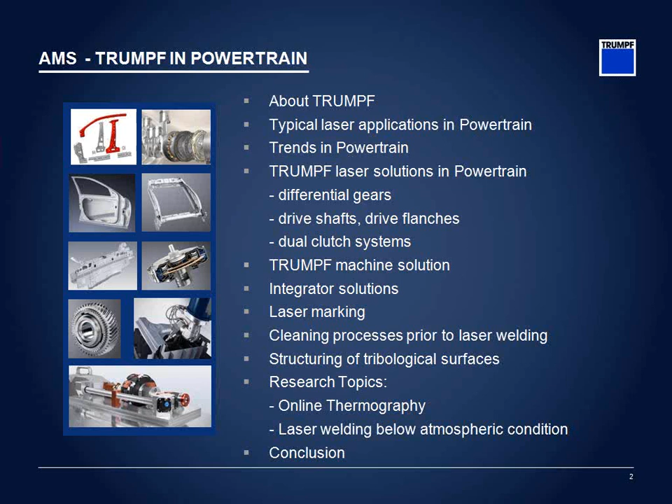Some information about TRUMPF, some typical laser applications in powertrain, and some trends in this field. First of all, TRUMPF is a high-tech company for laser and machine tools, and we have approximately 10,000 employees worldwide, and we are represented in all world markets, close to our customers with about 58 subsidiaries.

TRUMPF is divided into three parts. The biggest one is our machine tools, where we are producing flat-bed cutting machines, bending machines, punching machines, all for the sheet metal process. The second biggest part is where we are from - this is the laser technology of TRUMPF and the electronics field. We are producing solid-state lasers, CO2 lasers, and of course 3D machines, for example for cutting and welding processes, which we're going to show you later in more detail.

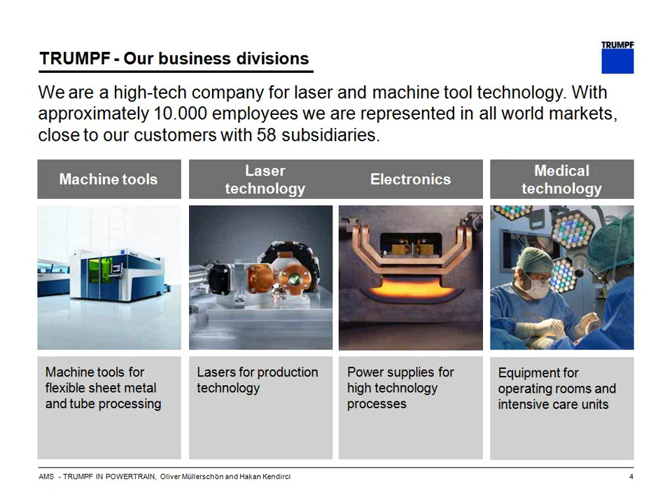The electronical field of TRUMPF means we can supply, even in the powertrain field, machines with induction preheating systems, for example. And the third and youngest part, on the right side, is the medical technology of TRUMPF. We are producing equipment for operating rooms and intensive care units.

Let's switch now to the laser technology of TRUMPF. Here on the left upper side, you can see we are producing CO2 lasers from 700 up to 20 kilowatt output power, and solid-state lasers in different kinds of areas. We can use these solid-state lasers, which is what I'm going to show you later in my presentation.

Of course, marking systems, which we are producing at TRUMPF in Switzerland, are used even for the powertrain business for marking parts, to mark a DMC code, for example, for traceability. I'll show this in the next slides as well.

The 3D machines, which you can see on the right upper side - this is an example. Our TruLaser Cell 7040 is mainly used for cutting processes, for example for hot formed parts which we cannot punch anymore - they're really hard, so we can use these machines to cut, for example, a B-pillar of a car made of these hot formed parts.

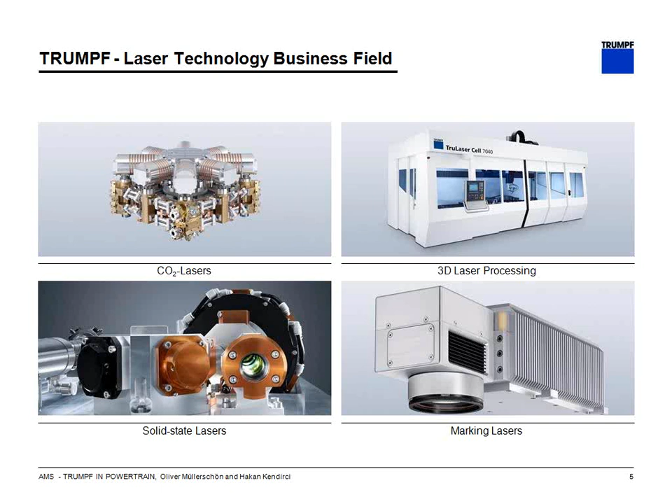Let's come now to the field of powertrain. Some typical applications are divided within TRUMPF into two groups. On the upper side you can see some examples of gearbox components, like a conventional gear part or a differential gears.

What I'm going to tell you more detailed in the next slides is the technology of double clutches, a very famous application worldwide. Even automatic transmission like 8 or 9-speed, nowadays up to 10 gears, uses laser welding for such typical applications in the field of powertrain components.

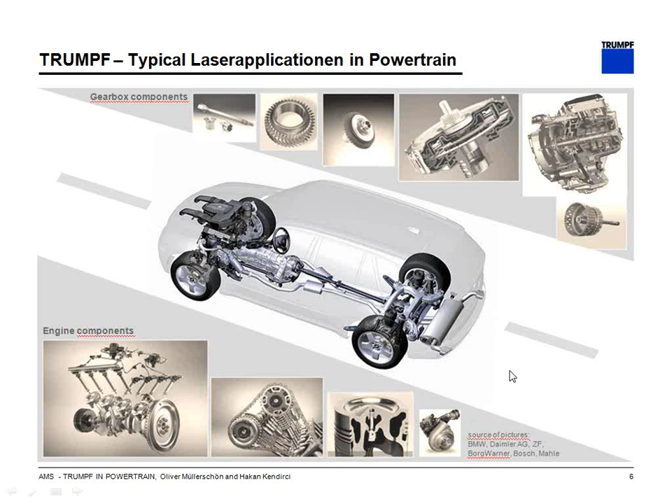On the lower side you can see some examples of engine components, like cams. A very important thing in the next few years, our upcoming technology, is to use steel pistons instead of aluminum parts, and of course the turbochargers.

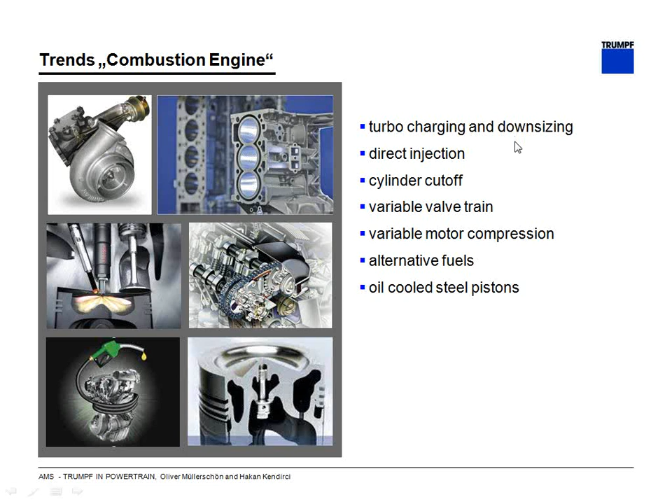This is a very common technology to reduce the consumption of a car in the near future. Some trends about combustion engines - you can see examples here. Turbochargers are going to be really important, and the downsizing of engines too. You can see examples here, even steel pistons again, the same on the side of transmissions.

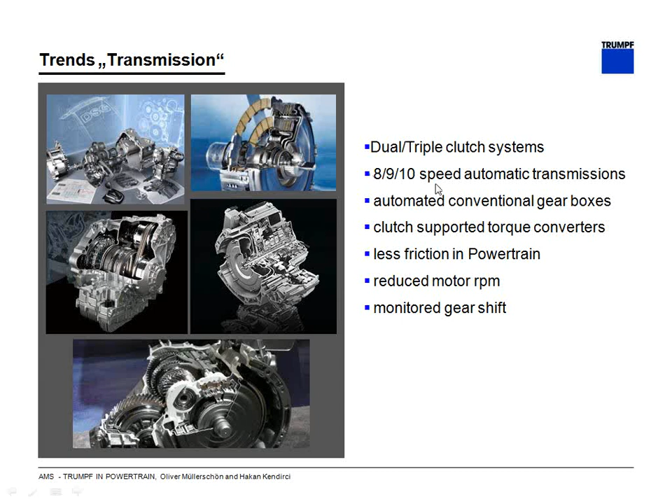I already mentioned the technology of double clutch or triple clutches coming to the market, and of course 8 to 10-speed automatic transmissions where we're welding with our lasers and systems a lot of different parts, which I'm going to show you later. So let's come now in more detail to these applications.

I want to start with a very interesting thing: laser welding of differential gears, with and without filler wire. Both applications are in mass production. In the next slides you're going to see more details about this.

Laser welding with an induction preheating system is sometimes necessary when we have two partner materials with a high carbon equivalent - then we can use our equipment for preheating prior to the welding process. Last in this part is laser welding of double clutches, where we can show you a cross-section with a lot of different laser weldings made with our systems.

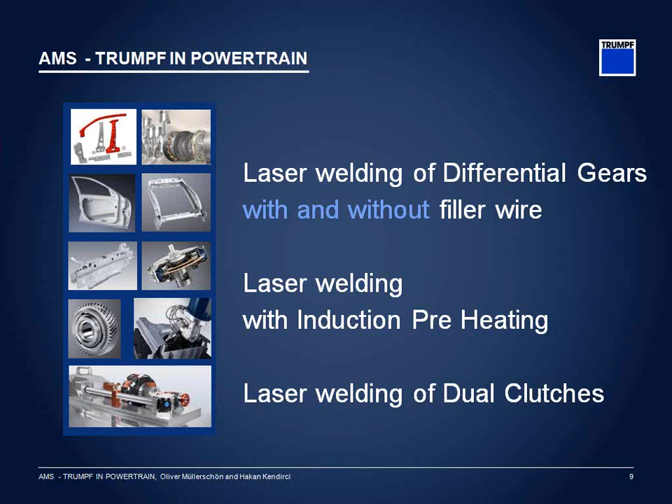Let's start now with the area of differential gears with filler - this is the reason it's colored blue for additional material. A few slides later I'm going to show you the same combination of cast material for the housings and case hardened steel for the ring gears, joined with a laser without any filler wire.

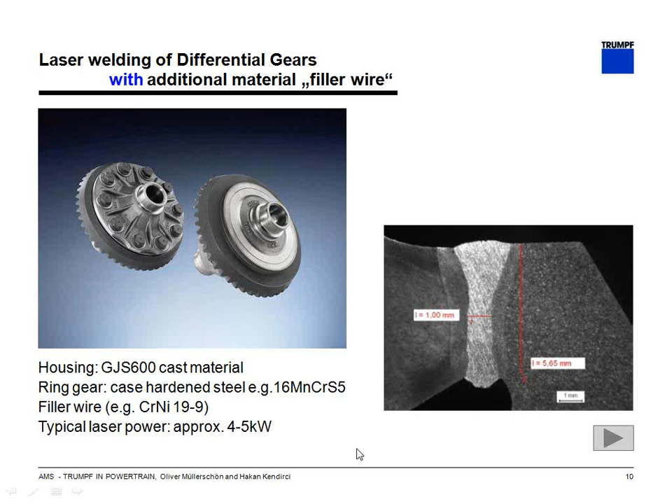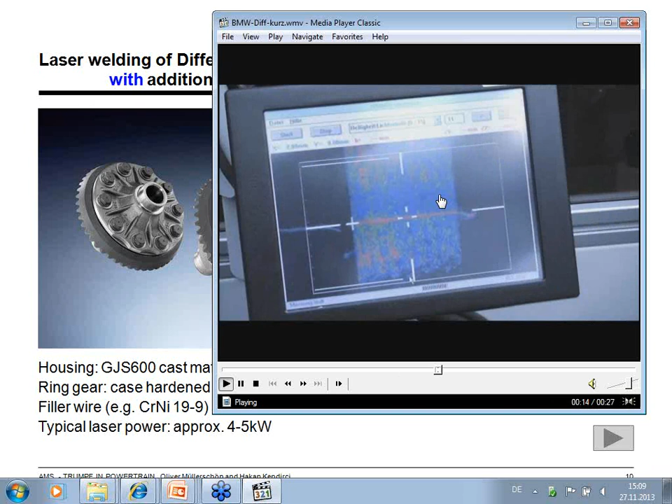In this example I can show you a short movie. You can see our welding head, equipped with a wire feeding system and a sensor system to find the right position. Then we can start directly with the wire. Typical laser welding speed is about 1.5 to 1.7 meters per minute.

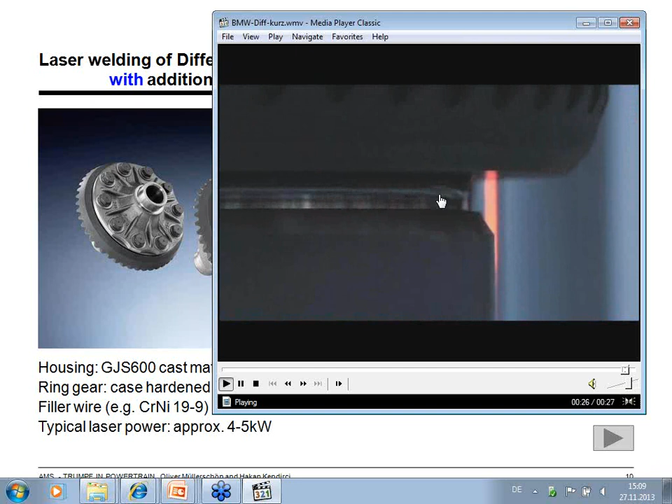You can see a typical cycle time - this is a very short one, about 30 seconds. The welding time itself is about 15 to 20 seconds. This depends on the diameters of the parts.

What was the idea to weld these parts? You can see on the left upper side the old bolted version, with these bolts here. I think it's quite easy to understand this is a very expensive application. So in 2004 we started to develop, with partners and companies like BMW, to weld these parts instead of using bolts for joining the housing and the ring gear.

What was the idea? Of course to reduce costs. It was also important to save material and in the same way reduce the weight of these parts. You can see these dimensions - with the bolted version we had a big flange, a big diameter, and the thickness was necessary to join these parts. With the laser welded version, the thickness is much thinner, and even the diameter of the housing could be reduced, so it was possible to reduce the weight.

Nowadays this is mass production, with a 360 degree laser welding to join the ring gear to the housing. It was also possible to transmit larger torques and to reduce or change the noise emission while using the car. This was also very important for our customers when we developed this application.

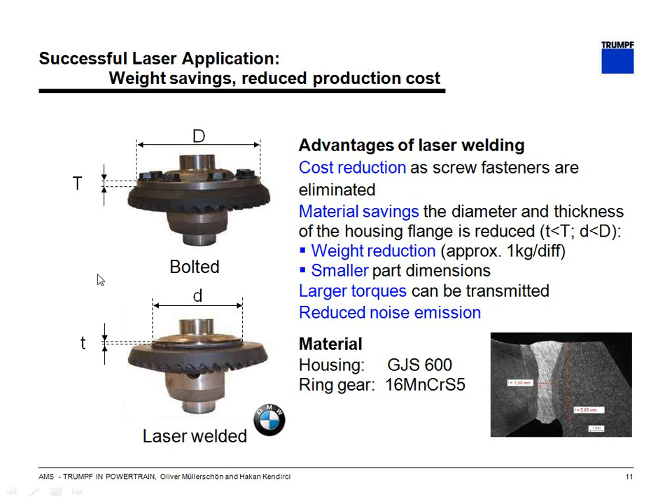Just an example here of an installation in the US, where we are producing a lot of these parts for a big car maker in the United States. The first step is always to clean the parts.

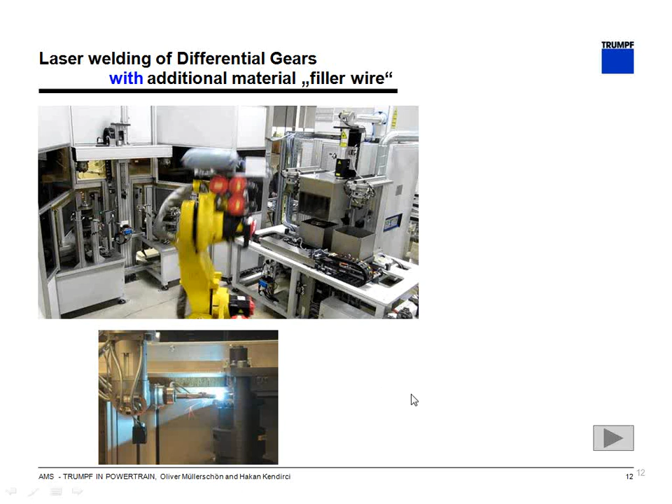That means with the first station - this is just an example, nowadays it's much smaller with the latest technology - we can clean the ring gear, for example. That means the surface where we have to join the partners, and the housing, which is made of cast material, with laser technology instead of a washing machine. The washing result is a very stable one, and this can be positioned prior to the welding process.

This is the machine you can see here in the left back side. This is a laser welding machine made by TRUMPF with two rotary tables. We have to place with the robots the washed or clean parts, and then we will join it, press the parts, and weld it in the same rotary table.

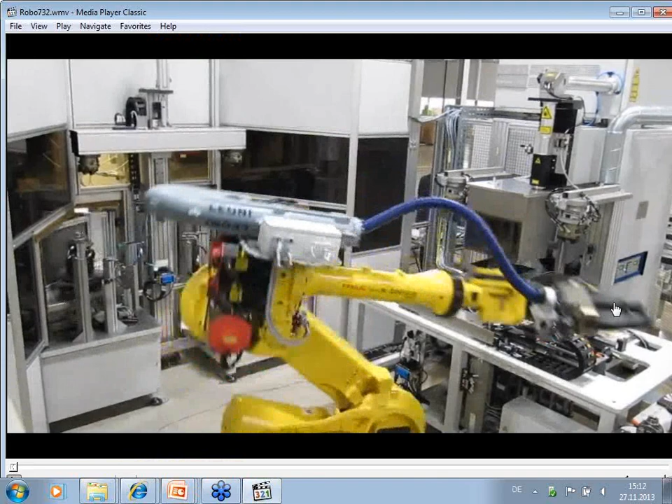Just to give you an idea, there's another short movie. The robot will pick up the raw parts, the housing and the ring gear, and place them at the laser cleaning station. After the cleaning process, it will be placed at the second station of the laser welding machine, in the back here.

So internally, we have the press step and the welding step. After this operation, we have to bring back the welded part to the same workpiece holder, because the bevel gear is already joined to the differential gear.

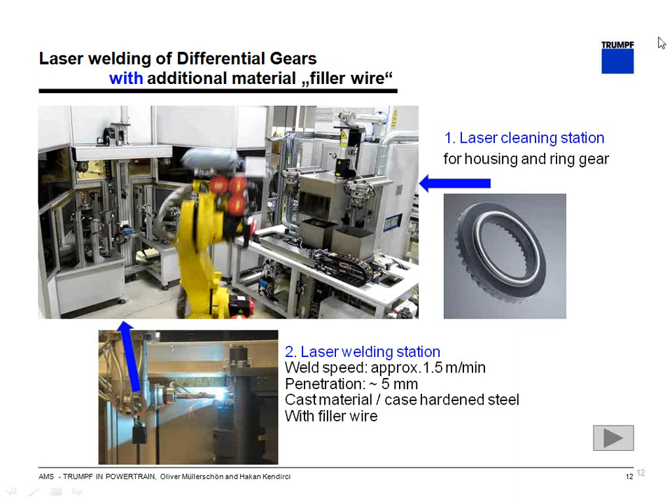Several years ago, there was an idea to weld these two partners - the housing, cast material with GJS 600, and the ring gear, mainly a case-hardened steel - without any filler wire. But the problem is it's a kind of hardening process, because the carbon content, especially of the housing, is very high, and if we go higher than 400 HV in hardness, there's still a risk for cracks.

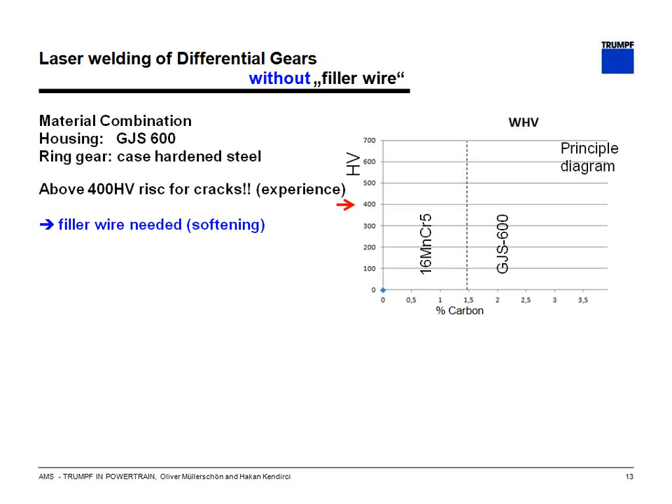This was the reason why most applications worldwide use filler wire to join these two partners. But there was still the idea: what happens if we mix the materials - material 2, the cast material, on the right side, and the case-hardened steel on the left side. If we're able to mix it in the right way, there's a special effect with the hardness. Done correctly, there is one mixture, one carbon mixture, which allows us to weld the parts without any wire and achieve a lower hardness.

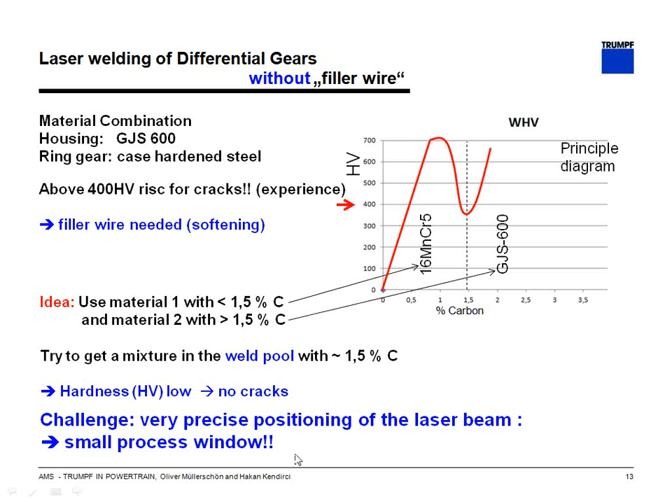But the challenge is we need very precise positioning of the laser beam, and it's still a small process window. Therefore, we developed a special sensor system called TRUMPF SeamLine Pro, together with a car maker.

This sensor system is able to detect three different steps with one camera. The first is the pre-sensor, so we can measure the joint and see where we have to weld or position the laser beam.

In the same way, we can get information with our in-sensor. With this sensor, we can look directly onto the keyhole, the process itself, and see the center of the focused beam and the welding process. If the part is designed correctly, this sensor can also tell us whether full penetration has been reached or not.

Thirdly, we can get information about the quality of the welding surface with our post-sensor, detecting things like overfill, a groove, or an undercut, so we can provide information about the quality of this process. With this system, we can document a lot of data for traceability, because we store many pictures from our camera system.

You can see here this is a welding head made by TRUMPF, and this is a special camera system. It's also possible to send a lot of information for the quality process for our customers.

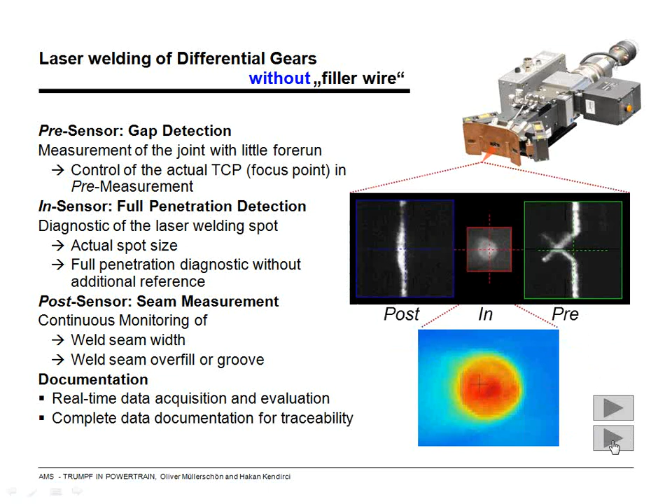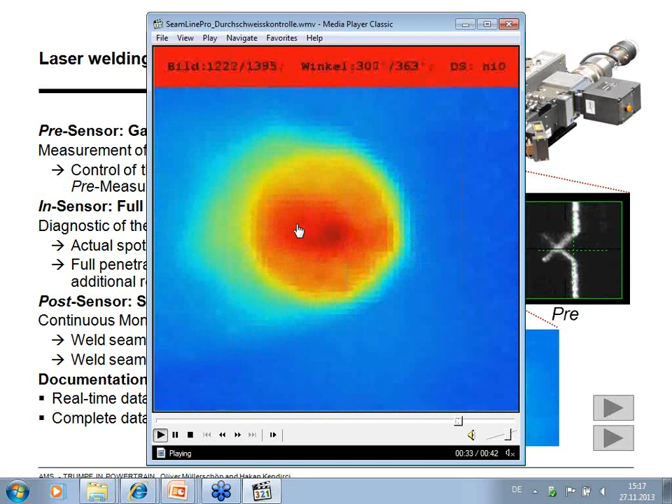In the same way, as I already mentioned, we can have full penetration detection. Let me bring it forward. You can see now this little black cross - this gives us information about full penetration, because this is the end, we have a complete look through the keyhole. If we detect this, we can provide information that we have full penetration.

This is an example from Daimler on that slide. You can see it's in mass production, welding without filler wire of these two joining partners. You can see the part itself, and a very thin and narrow welding seam on the right side, made without filler wire. The welding speed is 3 times higher, or up to 3 times higher, compared with the conventional laser welding process with wire.

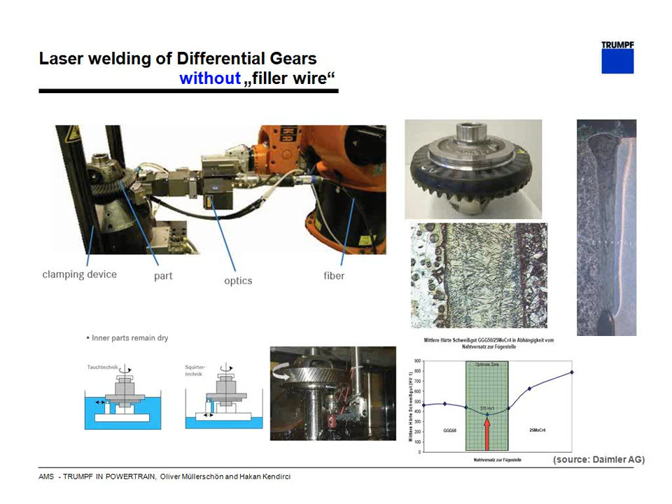In the same way, of course, you can save a lot of costs because we don't need wire. But if you like to start such an application, we need to develop it together with you, because we need a special preparation of the part itself.

So let's switch now to another application. If we have a lot of carbon equivalent with the two joining partners, very often we have to use an induction preheating system within TRUMPF. We are also able to provide such an inductive generator, an HF generator, for a preheating process.

I will show you some details about such a typical application, with this example of laser welding of drive flanges, or flange tulips. I just want to start this movie here.

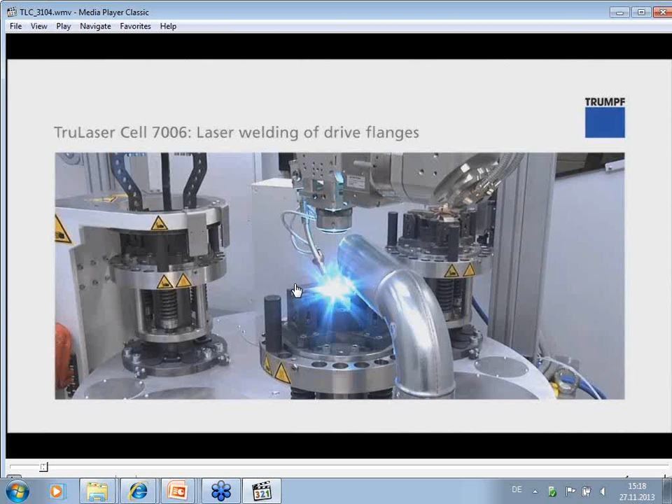At the very beginning, we will receive already pressed parts with this conveyor system. A robot system will pick up the part and place it on the rotary table, where we join and clamp the parts. Then we will dial the table to the next station.

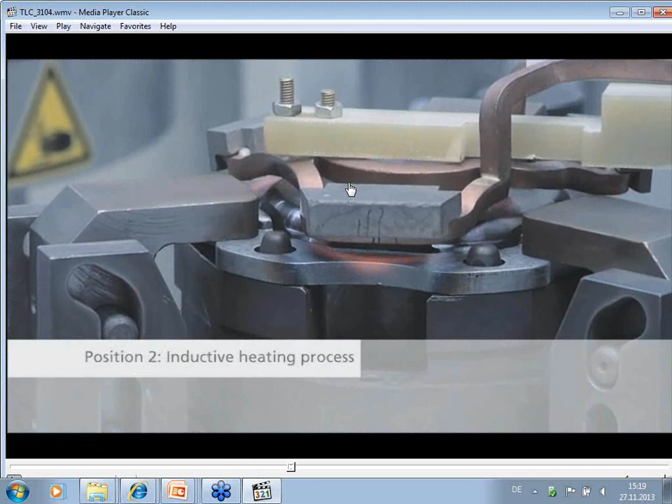The second station is the preheating station. Now you can see the inductor here, and we will heat up the part, and in parallel on the third station we can weld the part. So we can do it at the same time. You can see now the part here a little bit glowing.

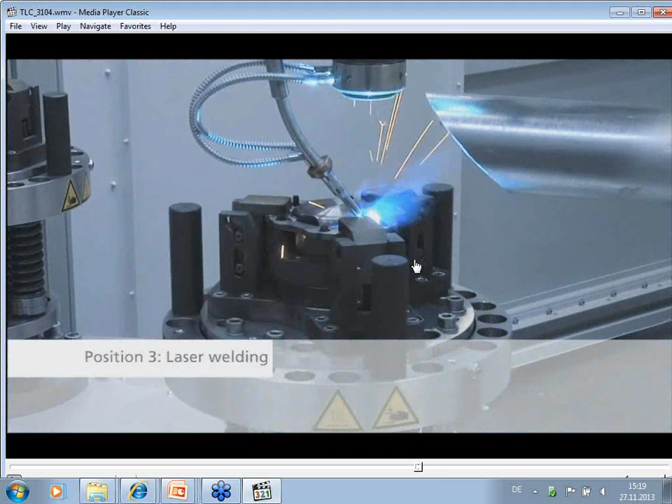The third step, as already mentioned, is the laser welding process, a deep welding process. In this example it's about 5 to 6 millimeters deep penetration. The temperature with this induction preheating system before we start to weld is about 450 to 500 degrees centigrade. With this process, we are able to reduce the hardness, so there's little or no martensite inside the structure of the material. After the welding process, we bring it back to the next exit conveyor.

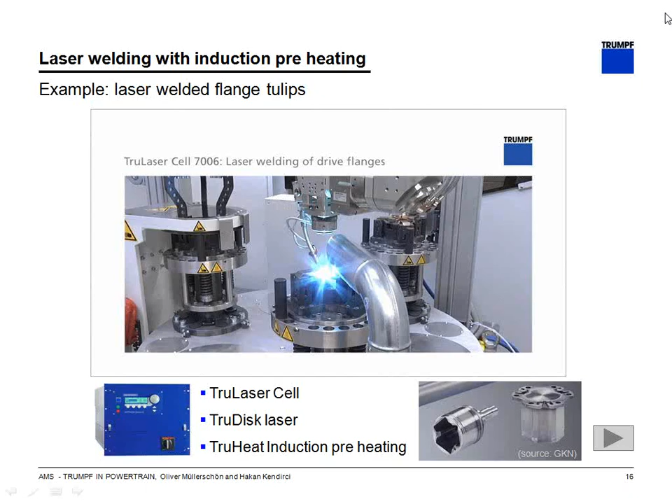The third application here is a very common one worldwide: laser welding of dual clutches or double clutches. Especially Volkswagen started with this application some years ago, together with the company BorgWarner, where we developed this process.

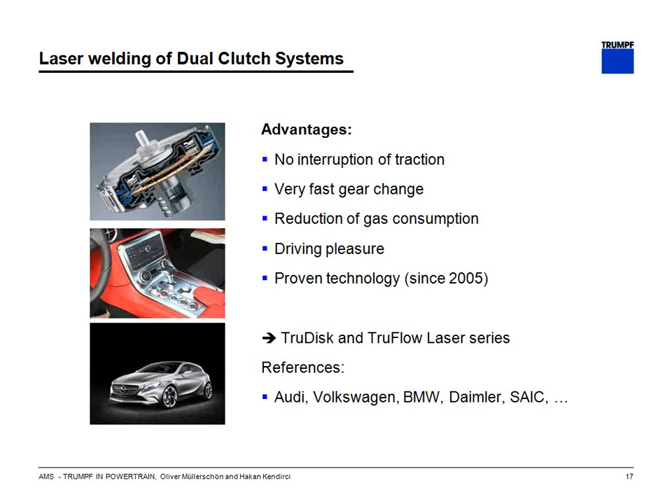You can see here some references. I think all of you know about this technology - it's a very fast gear changing, there's no interruption of traction. It's a very good feeling to use such a technology in a car. It feels like a race car. It's fun to use.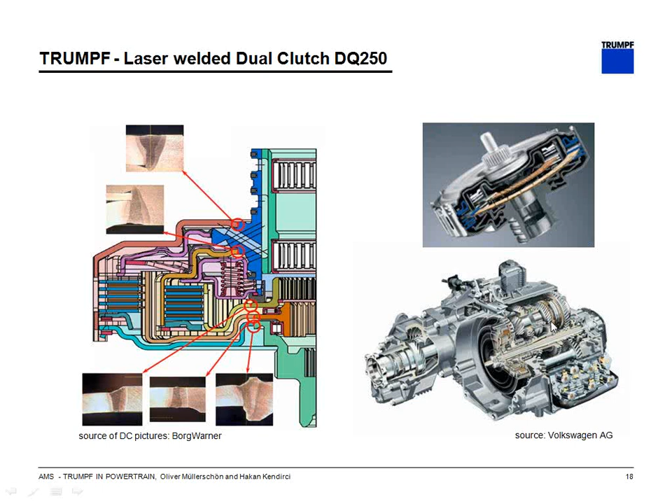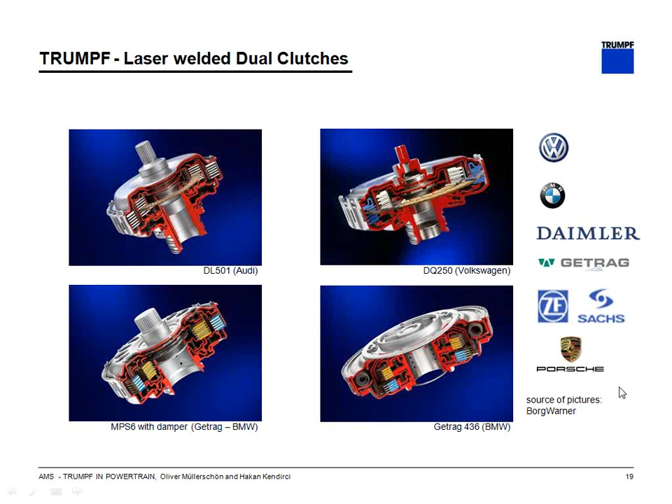Here's some references, some ideas. Since that time we started a lot of productions worldwide to produce different kinds of double clutches. What you can see here is just some examples and references where we are producing these parts with our lasers and machine systems.

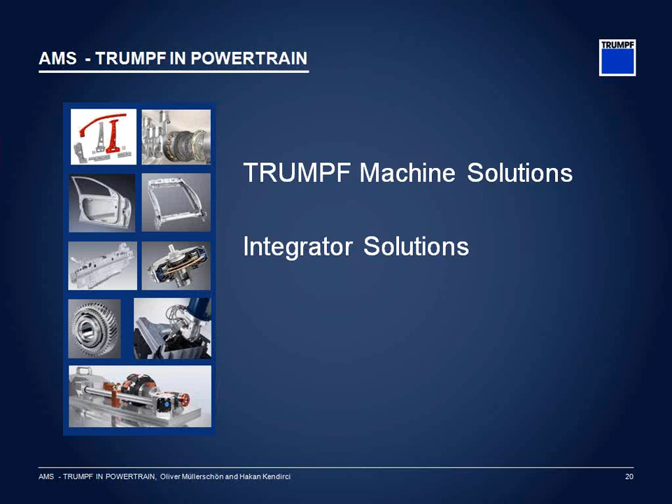Let's switch now. I want to give you some ideas about machine solutions made by TRUMPF. At the same time, if we need a fully automated production line, we have a lot of partners worldwide, and I want to give you some examples for a mass production system.

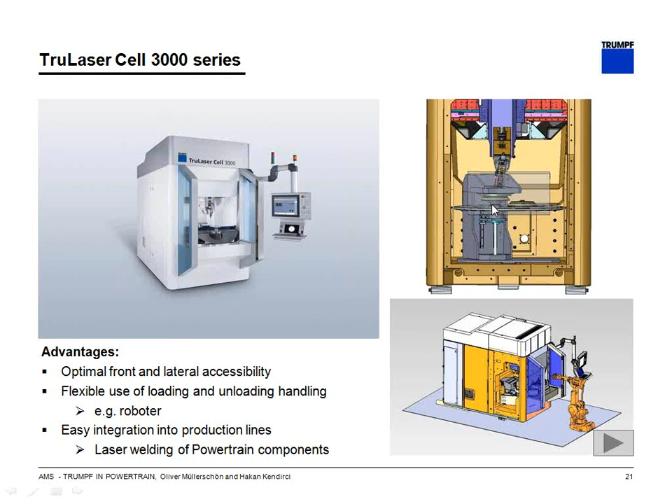Let's start with this machine. This is a new development within TRUMPF, our TruLaser Cell 3000 series. It can be equipped with a rotary or dial table and a C-press, which you can see here, to join the parts, to press the parts, to hold them down while we are welding. It's a very compact system, which we're going to see now in the next movie.

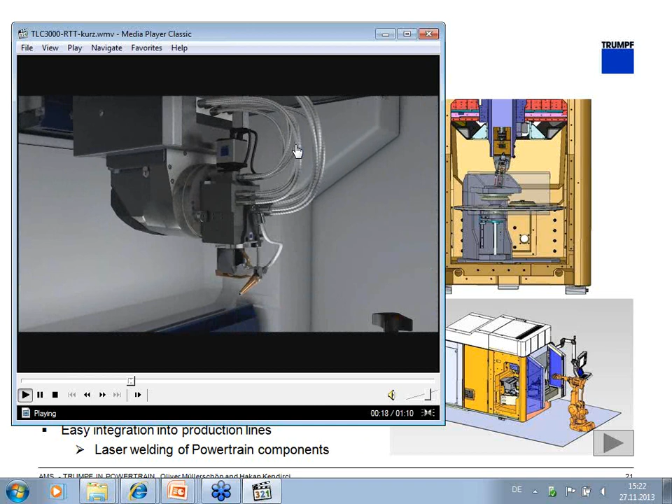You can see this is equipped with a dial table. This is just an example part. As you can see, it's a very compact footprint. All the safety enclosures are already around, and it's quite easy to change from a cutting process to a welding process just by changing parts of the optic.

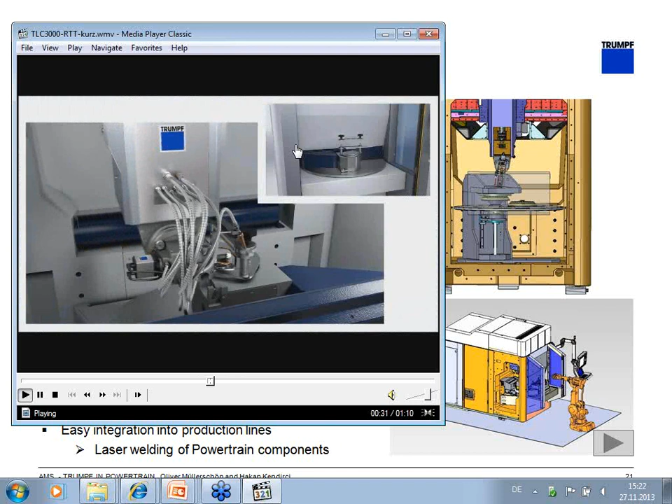While we are welding inside, as you'll see in the movie, we can load and unload outside in a manual way, or do it with a robot, it doesn't matter. You can see outside we can load and unload while we are welding inside.

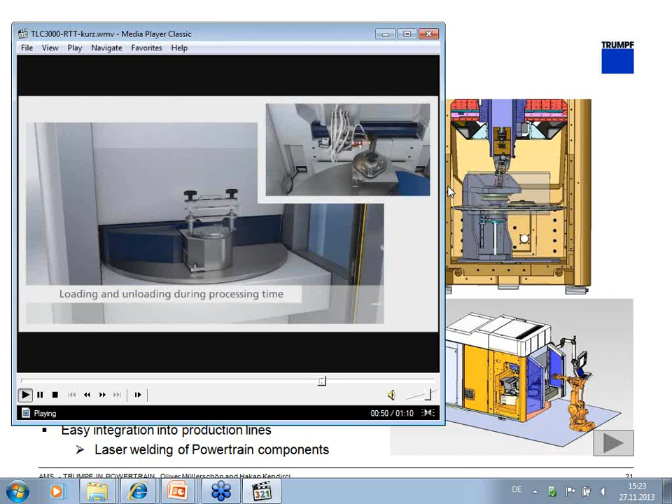This machine can also be used for a 3D cutting or welding process, as you can see in this example. If we bring out the part, it can be transported to a conveyor system, and as I already mentioned, we can load and unload again with the robot outside.

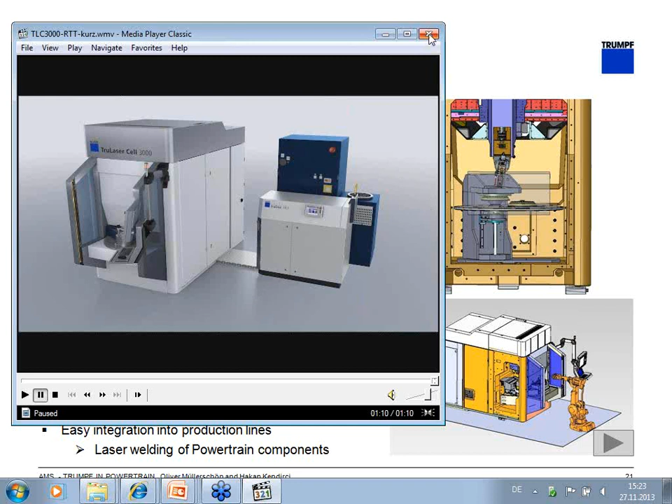What we need, of course, is the laser source, the solid-state laser. In a few seconds you're going to see it - here it's a TruDisk laser, for example, and a chiller device, and the extraction system is needed for the welding fumes coming up from the process. But as you can see, it's a very compact principle and a very nice and small machine.

Very often, of course, we have to quote a big machine system together with our partners. Here's just one example, company EMAG. They are integrating our TruMark lasers, for example, for a marking or cleaning process, and of course the TruDisk laser series of TRUMPF for the welding process itself.

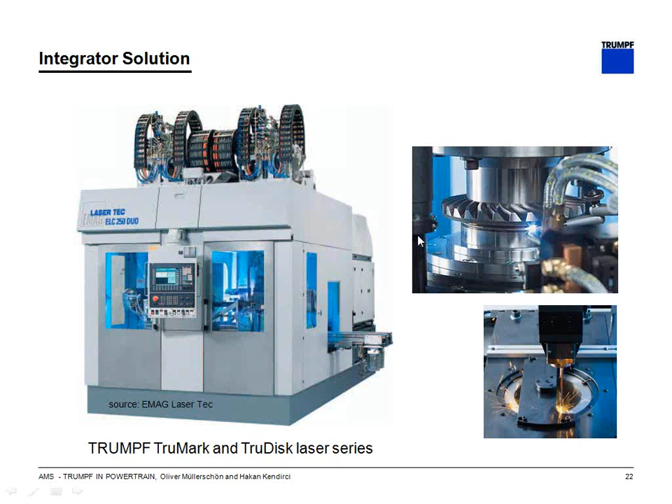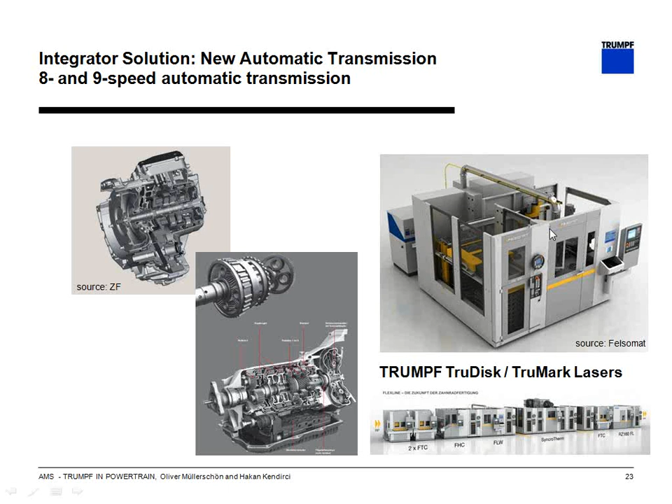Here in this example you can see another welding process for differential gears. A second partner, just as an example, is the company Felsomat. With this company we launched, one year ago, the first production lines for the 8- and 9-speed automatic transmission of ZF, which you can see here in the pictures in the United States. On the back side of the machine you can see the TRUMPF solid-state laser, and we can bring the laser via this flexible fiber cable to the welding cell inside this machine system.

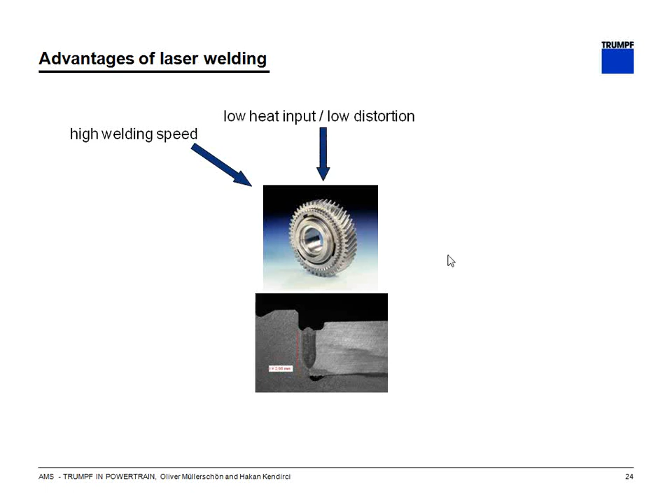Here I'm going to show you some advantages of the laser welding process - I think it's well known already. Of course, we can weld with a very high speed. We have a really low heat input and low distortion with this welding process. We have high welding seam quality, of course. We can join different materials, as I showed you in the last few slides. We have high process and geometrical flexibility with this technology. It can be easily and highly automated.

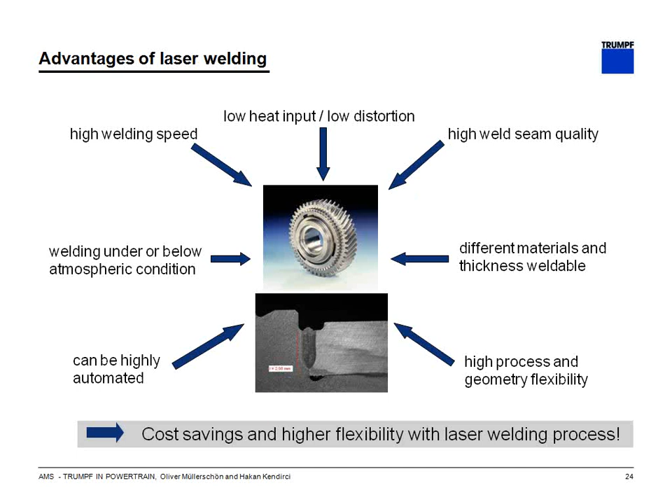I think this is also interesting for you: we can weld under atmospheric and below-atmospheric conditions, which my colleague Mr. Hakan Kendirci will show you later at the end of the presentation. At the end, of course, for our customers, it's very important to save costs and have a really flexible system for their welding process.

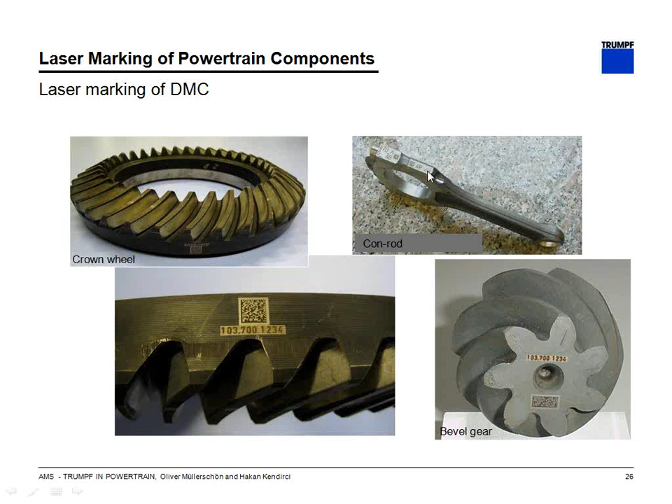Let's switch now to laser marking. I think this is a well-known application. You can see a typical example of a DMC on a ring gear, on a bevel gear here, for example, or on a conrod. We can use comparable technology also for a cleaning process.

Prior to a welding process, we can use it instead of a washing machine - just want to give you the idea. Here you can see a ring gear; this is the surface after the cleaning process. It's very clean, and we are also able to remove a complete layer of the surface of the material, but of course we can also remove oil, grease, and so on.

This improves the welding result itself, so that means we have less spatters, we have a complete cleaner process.

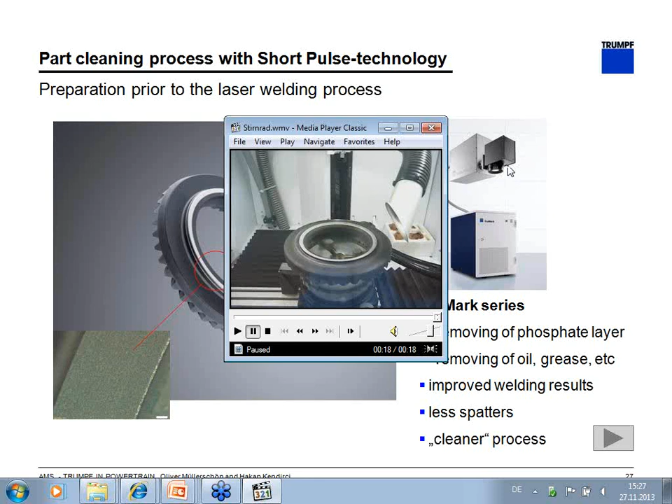Just to give you an idea, this movie is made in our lab here. It's the ring gear. You can see this black colored surface, or layer - this is phosphate layer in this example. As you can see, within a few seconds we can remove it completely from the surface, so we have the blank material without any oil or grease. This is the best preparation before we weld the parts, so it's a good way to install this technology just before the welding process itself.

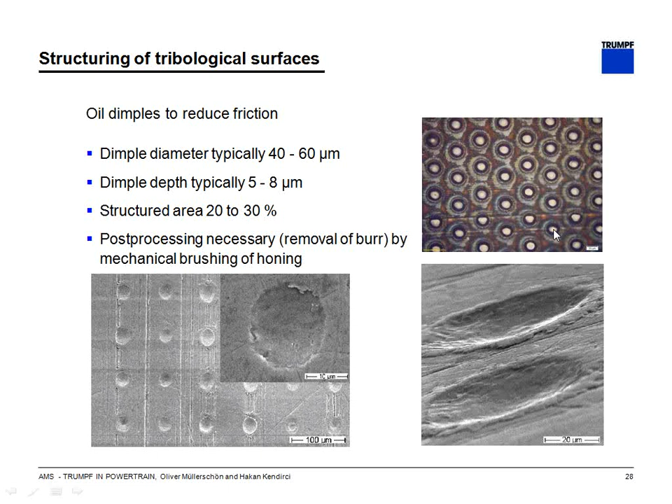But we also can use this short pulsed laser for changing or adapting the tribological properties of materials. Here you can see some oil dimples made with such a short pulsed laser. Typical diameter for such a little oil dimple is about 40 to 60 microns, and the depth is about 5 to 8 microns, a very small one. We need, of course, post-processing to remove the burr, but after this process we have a lot of these little holes where we can have oil in it. This can be used, for example, in the motor, in the engine, in the area of the cylinders.

The same technology, we also can use to increase the friction. Here's another example of a conrod, before we bring in these bearing seats. We like to use the laser shown in this little picture to increase the friction, because with this technology we can be sure that the bearing seat is done in the right way.

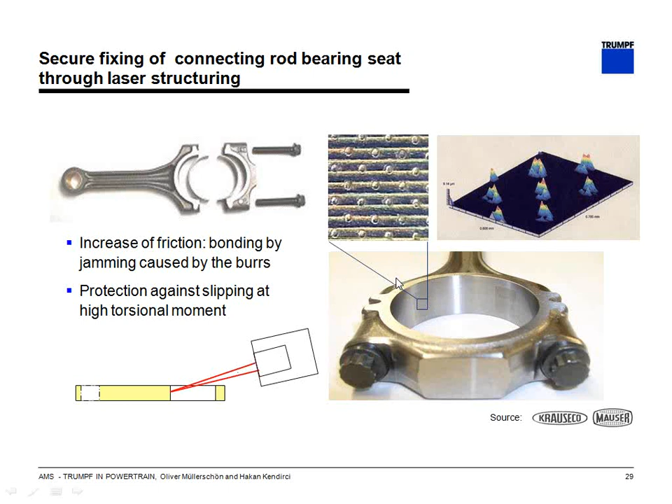We can use our laser technology, here you can see the principle of it, to bring this typical surface to the inner side of this bore.

Same way here, another example, even here we want to increase the friction. In this case it's a cam part. Before we bring it to the camshaft, we can use the technology to increase the surface friction on the inner side of the cam, and then we can assemble it with the camshaft itself.

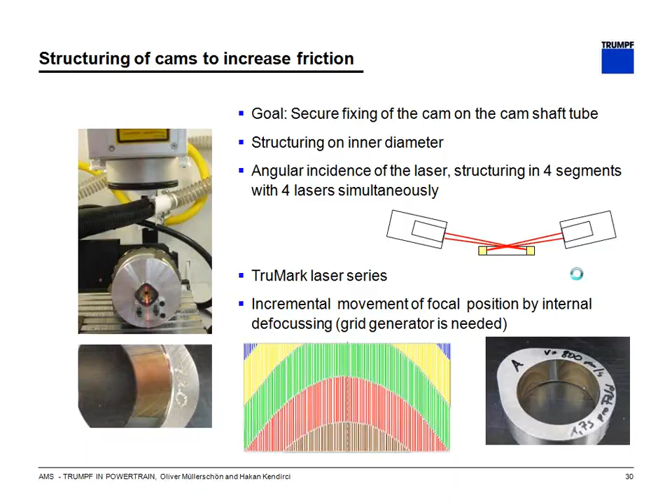So at the end of the presentation, I just want to give you some ideas together with my colleague Hakan Kendirci. These are research topics. The first thing I want to show you is an idea from TRUMPF, the online thermography. What does it mean? We can use our optical systems for our solid-state lasers. We can equip it with a special camera, which was used for the welding process we saw before, for the SeamLine Pro sensor system.

And we can add, for example, such an InGaAs camera. You can see this little picture here on the left side. Without any additional light, we are able to check the quality of the welding and get a lot of information about the laser spot, the melt pool width, the melt pool length, and of course the thermal trace width, and so on. With this technology, we are able to give a lot of information for the quality process for our customers, to show them whether the quality of the welding was okay, or there was a little problem, or they have to check the welding, or whatever.

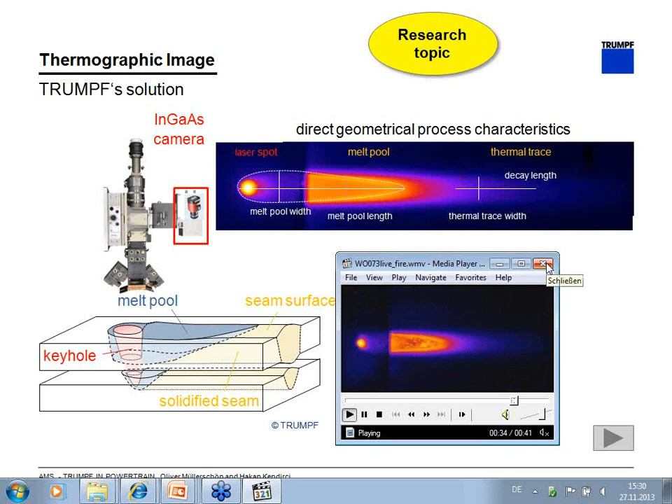So with this technology, this could be a really interesting example here for mass production.

How does it work? Here again the picture. This is our welding head, and here we add on such an InGaAs camera, and we have a coaxial look with the hot beam. This is the way for the hot beam, so somewhere here's the welding process. We can have a coaxial look with our camera systems directly to the process and get a lot of different information to check if the welding was good or not.

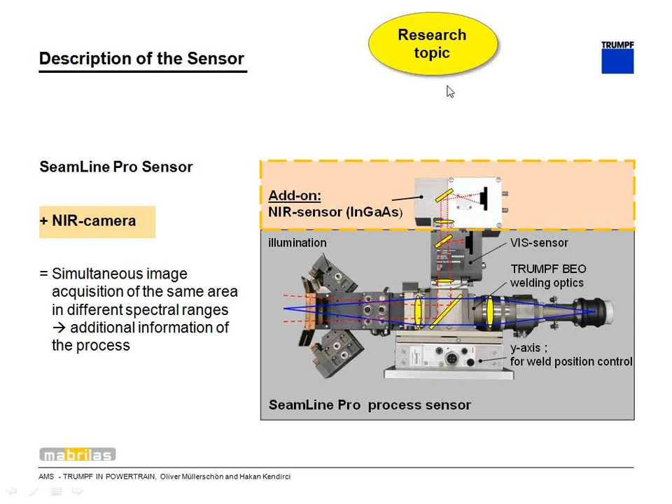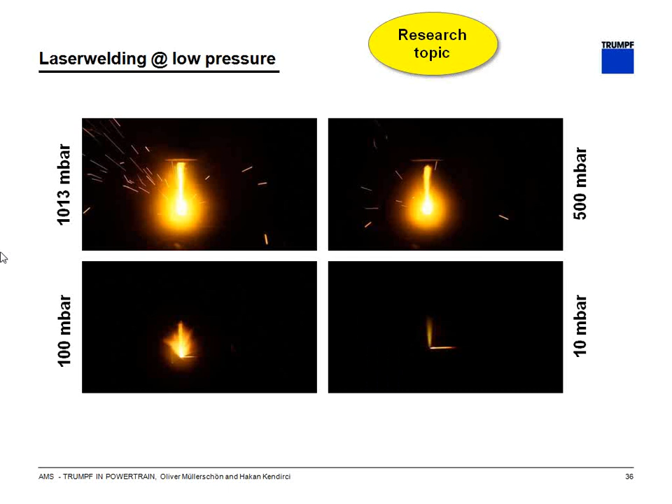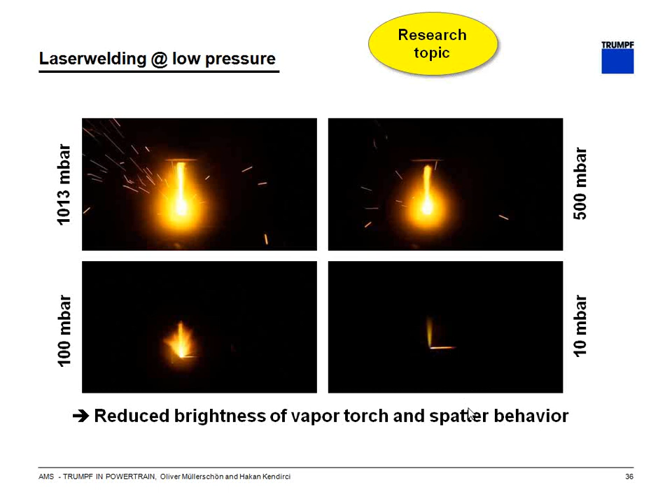Looking at this welding under atmospheric conditions, we see a very big vapor torch and a lot of spatters. In the next pictures we go step by step into a deeper pressured area, down to 500, down to 100, and also down to 10 millibar. We see that the vapor torch and the behavior of the spatter is changing. At 10 millibar we have nearly no vapor torch, or a very small one, and nearly no spatters.

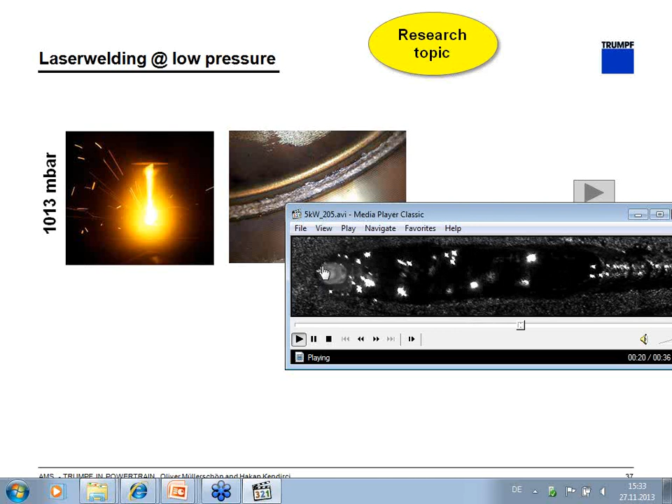First, looking at a movie made with a high-speed camera system in our laboratory, we see a very good surface of the welding, but we have a little turbulent melted area which brings us a bit of spatter. You can see the spatters here on the welding zone.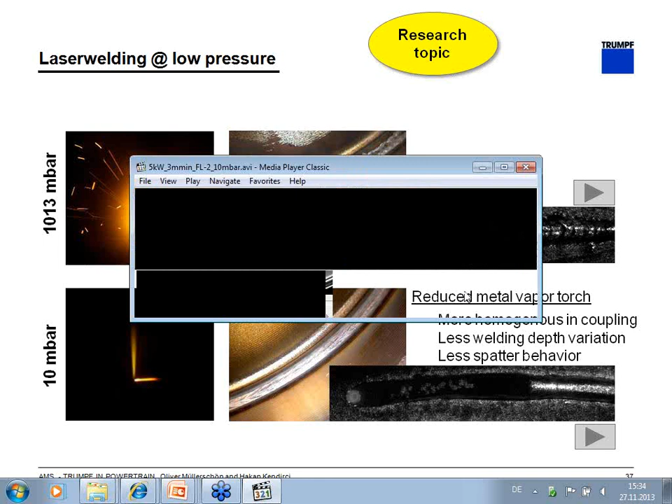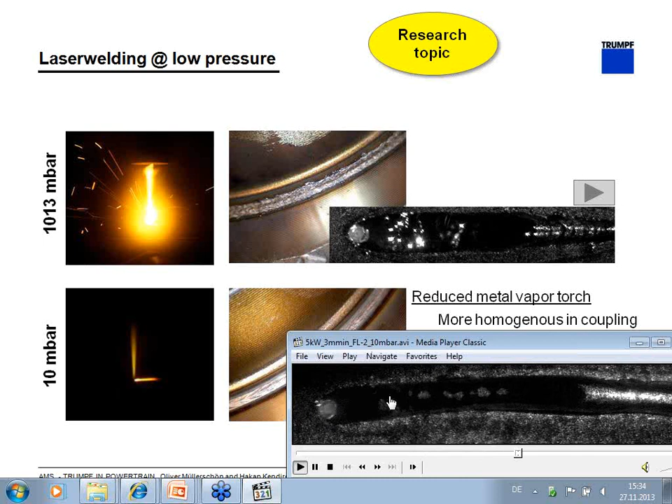Looking now at the high-speed camera, we can see a very smooth, very clear, and much less turbulent area on the welding zone, with nearly no spatters. Sometimes you see some spatters flying up, but not like the welding under atmospheric conditions.

But it's not only about the quality of the welding, we can also save energy. If we compare these two different pressure areas, from atmospheric to 10 millibar, we can weld with the same parameters deeper inside the material. Here we are welding 10 millimeter stainless steel, and you can save energy up to 30 to 35 percent. It depends on the material and the speed of the welding.

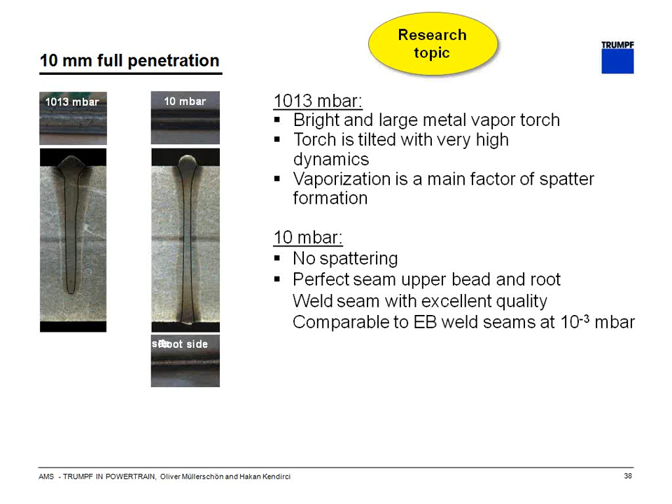Now we can talk a little bit about the conclusions, and then we are finished. My colleague told you a lot of things about our machines: TRUMPF laser-based solutions for high volume automotive production. Laser technology is an enabler for lightweight design and helps to reduce CO2 emissions in production.

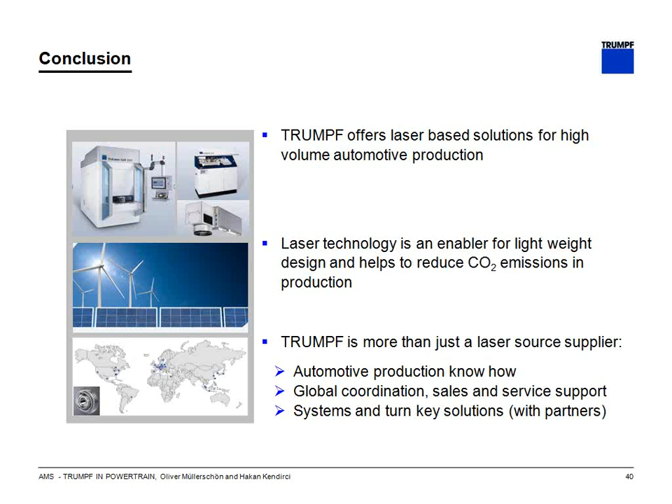TRUMPF, I hope you know it, is more than just a laser source supplier. We have automotive production know-how, global coordination, sales and service support, systems, and turnkey solutions with our integrators or partners. I thank you for your attention, and I hope that you have a lot of questions now. Thank you.

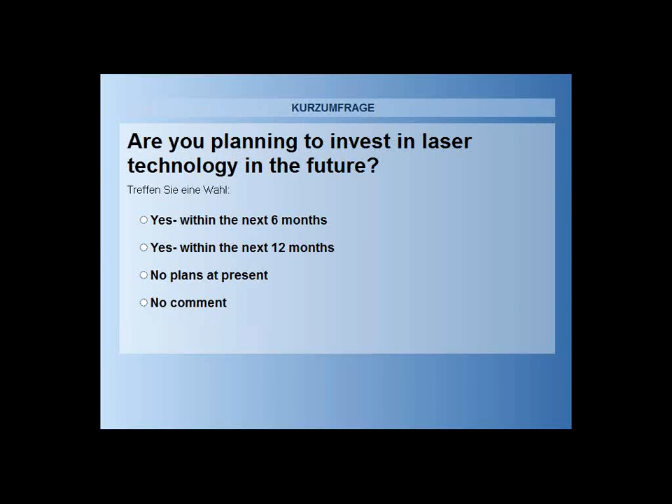One of the questions that came in: welding of differentials, is this done by radial welding or axial welding, and why, which method?

Hello, this is Oliver Müllerschön again. Nick, can you please repeat the question? Oh, sorry guys, the question is regarding welding of the differential, which we showed earlier in the presentation. And the question is, is the welding of the differential done by radial welding or axial welding?

Okay, I got it. Well, we have both in mass production. This is just a matter of the design of the part, especially for front axle systems. Axial welding is used very often.

In the rear axle, it's mainly the radial version that's used. The only issue is if you compare an axial with a radial welding, we have a shrinking process during the welding itself. That means with an axial welding, there's no chance for shrinking of the material, so there's a higher risk of cracks if the design of the part isn't done right. With a radial weld and a good design, there's sometimes the possibility for the ring gear to move a little during the welding process, and this is better against cracks. Both are used in production, but we have to think about the design itself. If the stiffness is too high, usually radial welding is much easier to control.